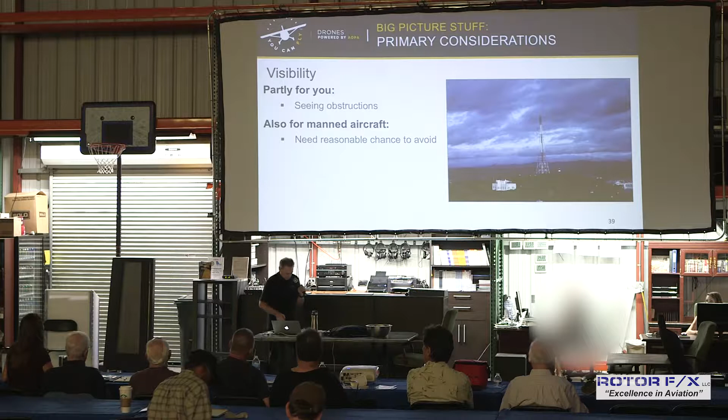Oh, I want to talk also, before we get away from this, let's see, did we talk about this? No, we're about to talk about it, sorry. Okay, here we go, wind.

So, what about wind? Bigger machines can handle heavier winds, generally speaking. So if you're flying a little drone, look at what Bill has over here on the Blue Skies table. It's a Phantom 4, right? And it's not that big. It's subject to wind gusts. If you get winds over about 10 or 12 miles an hour, you're going to have some issues with it. So the bigger the machine, the better it will handle the wind.

If you want to capture silky smooth footage at 10 knots, you're going to need a pretty big rig and a pretty good gimbal on that rig, because you're not going to get silky smooth footage at 10 or 12 knots with the Phantom. It's going to be juggling to hold its space too much.

So wind is a fickle thing, which may result not just in unstable footage, but also uncontrollability. Examples might be strong wind currents, or if you're flying close to the ground, wind can change very quickly in very different ways.

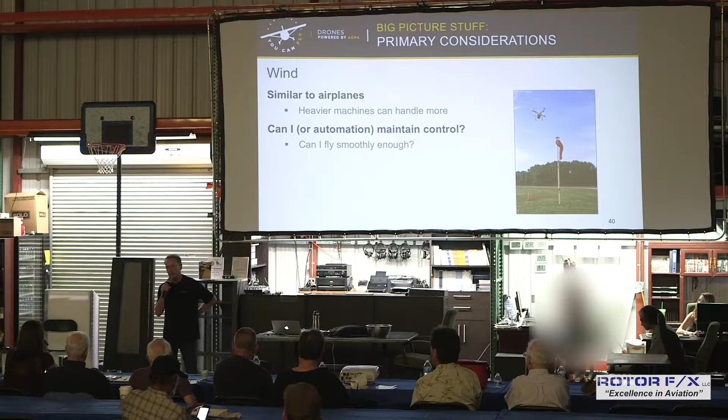I'm going to leave the wind shadow, right? The wind is going to come, and I didn't know it was coming because I wasn't aware of it. I was behind the building. So you've got to be aware of stuff like this, watch for it, and anticipate it.

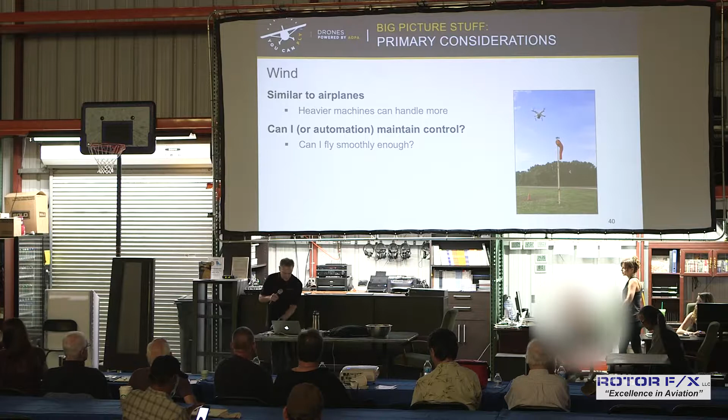Yes, density altitude. How dense is it? Okay, so there's this thing called standard pressure and temperature. Standard barometric pressure is 29.92 inches of mercury. Hg stands for mercury. And standard temperature is 15 degrees Celsius, which translates to 59 degrees Fahrenheit.

So, what you're going to find is all of your drone performance measurements will be made at standard barometric pressure and standard temperature. Meaning that if I buy a DJI Phantom 4 or rent one from Blue Skies, and I go fly it and I look at the specs and it says it's got 22 minutes of duration or flight time, right? I think, great, I can fly for 22 minutes. Well, guess what? That would be great if you were flying at sea level.

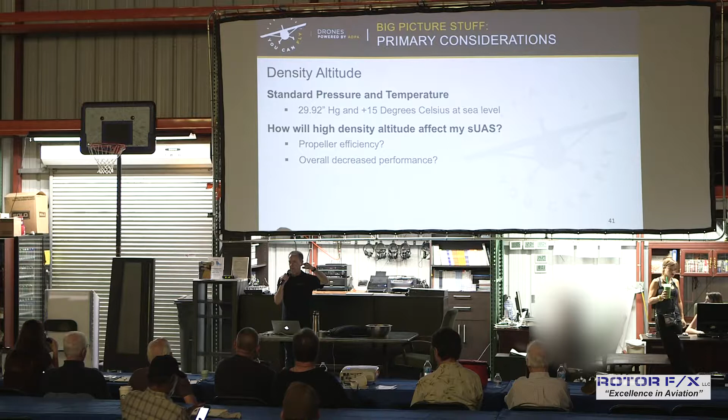What if you're flying at 4,000 feet? The air is less dense. It's called density altitude, right? So what's going to happen in less dense air? I'm sorry, I can't hear you. It requires more power to fly. Not just more power to fly, but ultimately, if you get into a situation where you have a heavy payload that's marginal when you first lift off at sea level, you get to 4,000 feet, you've got that same payload, you may not even be able to get off the ground.

Or if you can get off the ground, you don't have any performance margin, meaning that when you get off the ground to fly a payload, you need a performance margin that gives you what you need to accelerate in order to control the aircraft, to rise or fall or to move forward. All of that requires extra power. And if you're carrying a marginal payload at a marginal density altitude, and the props are having a tough time chopping that air enough to keep you in the air, you've got a problem.

So is density altitude a thing for unmanned aircraft? Yeah, it is. Especially when you get up to the higher altitudes or on the hot days. We've all heard how sometimes it gets in Phoenix or in the Arizona desert to above 110, and they say some airplanes can't fly. That's because the air is not dense enough to give them the lift that they need to get off the ground.

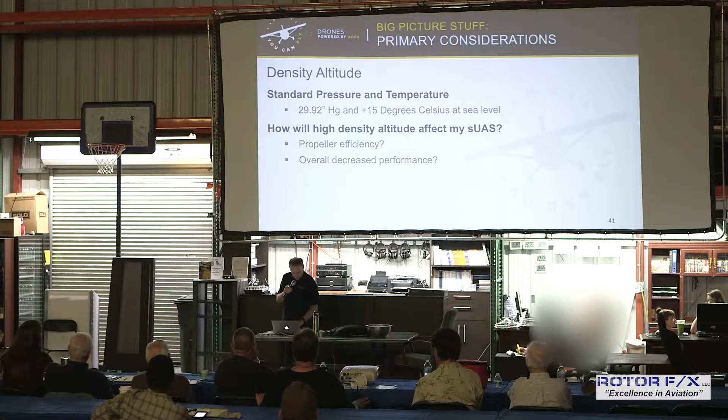And you have the same problem with a propeller, because what is a propeller really? It's just a little wing that spins. Instead of a fixed wing, on the Phantom you've got 4 little wings that spin, right? They're cutting the air, and they're giving you that lift. Does that make sense? Okay. Whew, we got through density altitude. Wow.

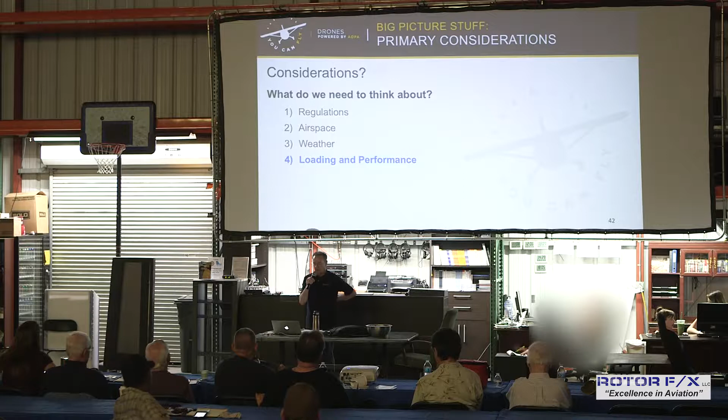Loading and performance. This is fun. We started to nibble around the edges of that when we were just talking about payload, okay? And it's not just payload, but it's also the performance of that payload. So what happens on a small drone with a fixed camera? Can I borrow your Phantom for a second? Thanks, Bill.

So here's a Phantom 4. Professional, yeah? That's Phantom 4 Pro. It's a great little rig. It's a nice little camera on the bottom there. It's a great design because they've taken the optical system and sensor out of a real camera, and they've repackaged it and repurposed it for use on a drone. It's a great package because it's light, it's easy to control. The gimbal requirements for a small package like this are a lot less than they would be for a big camera like what Don is shooting with, right?

Don, bring one of your cameras up here as long as you're headed this way. If you put one of Don's cameras on a drone, do you think it's going to be more difficult to control? Yeah? Okay, and not just difficult to control, but look at this thing. Look at the length of the lens, okay? Do you think you might have some balance issues relative to the center of gravity on the drone? And we'll talk about that in a minute. Oh, I got to give this back. Thanks, Don. Thank you, sir.

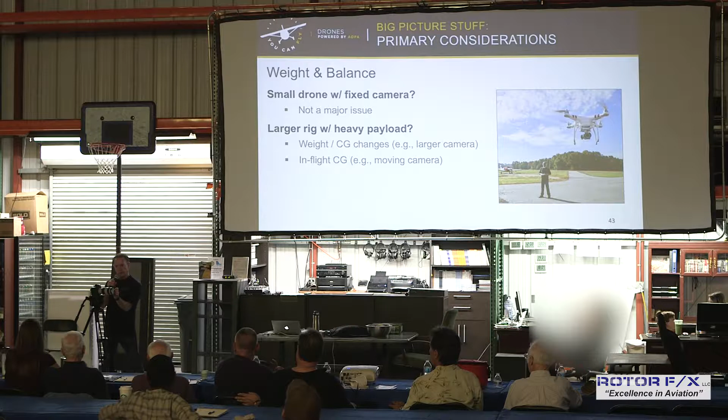Okay, where are we? Loading and performance. Oh, moving cameras also. I'm going to use your camera as an example, Don. Thank you. I know I'm making you crazy now. What if this lens, now, I'm not sure. May I zoom this? Yeah? Okay, so this is internal. Right, so this is a professional lens, meaning that if I zoom it, the zoom happens internal to the lens. The lens doesn't get longer because the optics are all moving inside the lens.

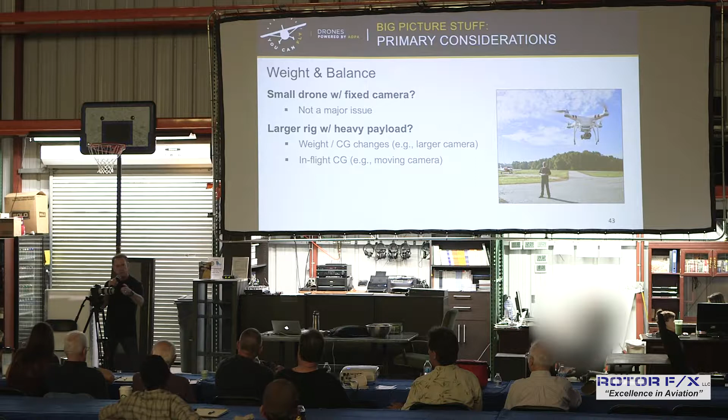But on some less expensive lenses, what happens is when you twist the zoom ring on a telephoto lens, the lens actually extends. And what does that do if it's hanging on a drone and it's perfectly balanced at this point, but if I extend the lens out here, what does that do to the center of gravity? It throws it off. There's going to be more weight on the front of the drone, right?

So it's going to reduce your duration time. Ultimately, it could affect your ability to control it, again, if your payload is marginal in terms of the amount of weight that you're carrying. Make sense? Thank you.

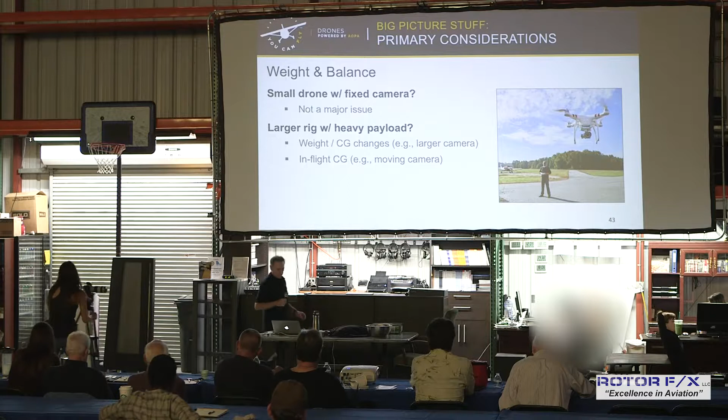Okay, load factor. We really talked about that for the most part. Could you have a stall situation with a quadcopter? Absolutely. Again, we talked about this. The propeller is nothing more than a spinning wing, and if it's got too much load...

If the winds come, let's say you got a heavy wind coming from that direction, now it's leaning in order to keep itself stationary, which these drones do based on GPS coordinates. It's leaning into the wind, so it's exerting more force there. Now, if you've got a marginal payload, you're spending all your time trying to stay level. You may lose altitude while you try to stay level, and ultimately you could crash, right? So this whole loading and performance and balance thing, it's a real thing for drones and aerodynamics.

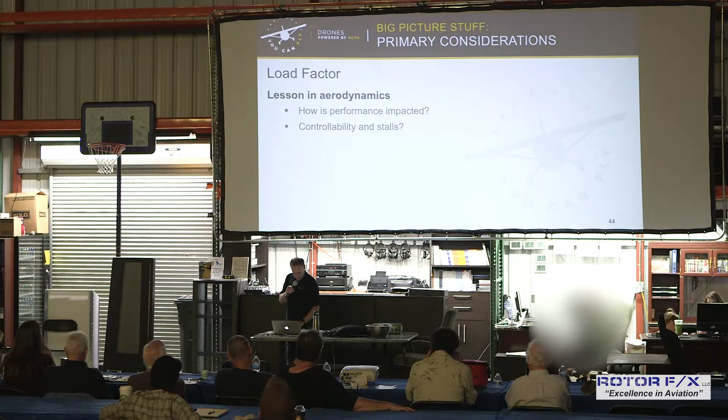Performance, good sources of performance information are the manufacturer's handbook. You'll find the specs in the handbook, obviously, the user's guide, information about the duration and flight time and things like that. You should be aware of those specifications.

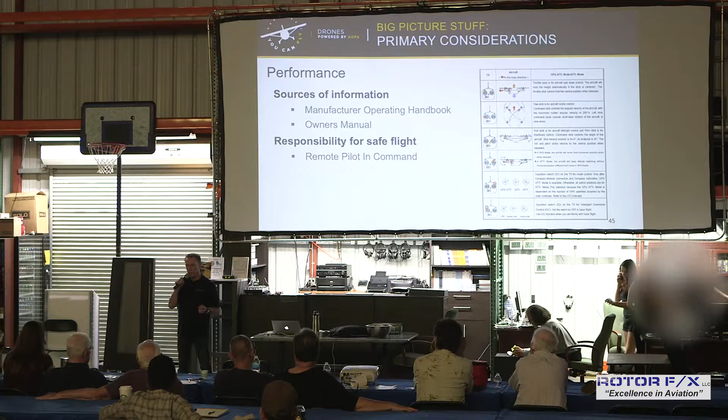The one thing to remember also is, even though there are specifications out there, what if you get out there with that Phantom 4 and something happens and it's not balanced correctly or something like that? Who's responsible if that drone crashes? Is DJI responsible? No, you're the pilot in command.

You're responsible. You own this whole situation, baby. From start to finish, from ground to altitude. You own the whole thing. If that DJI drone crashes because of a firmware problem, it's not DJI's problem in terms of liability, it's your problem.

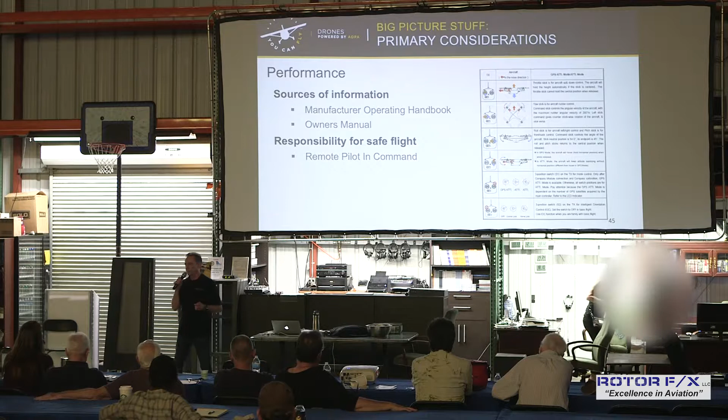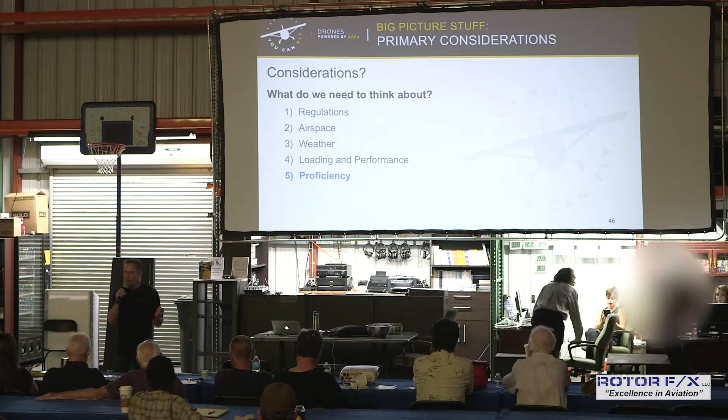Proficiency. Let's talk about stick time, right? What's this thing called proficiency? What do we mean now? For some of my pilots, when I say proficiency, what does that mean to you? Skill and ability. Perfect. Thank you. Skill and ability. What does that mean? It's experience, right? How much experience do you have with that particular aircraft?

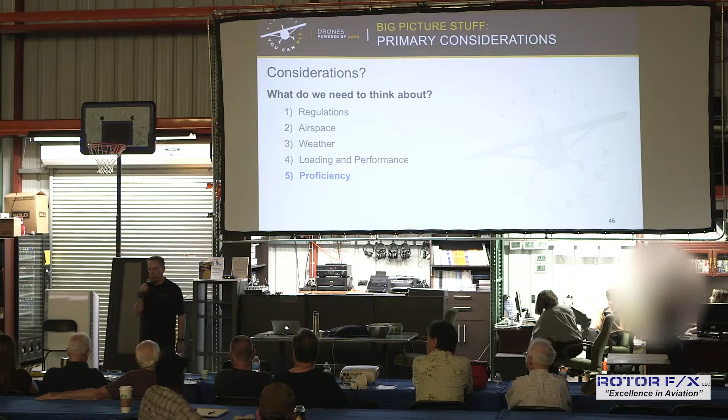And on a UAV like the Inspire 2 here or the Phantom 4, what that translates to is stick time. And the key to this is just get out there and get your stick time. People often ask me, are they difficult to fly? Well, no. I mean, I could set it up and have it flying in 5 minutes, and there's actually a button you can press on the screen of the DJI Go application to have it take off and hover at 4 feet. That's a no-brainer, right?

Yeah, until you have to actually fly it, okay? And the key is, when you first start flying these things, as many of you know if you're flying them now, it's great when it's nose out, because left is left and right is right, and forward and backward are the same. But what happens if it's facing me? Everything's reversed. Everything, okay? And what happens if it's going this way? Or this way? So you get the idea.

The key to this thing is getting enough stick time to where responding to a situation becomes intuitive. Meaning that if I'm flying, and guess what, I'm getting too close to a tree, I'm going this way, what do I do? I'm going to hit backup, right? Which may not be intuitive until you've got enough stick time to know to hit go backwards instead of go forward, right? So my recommendation to you would be go out and get 20 or 30 hours of stick time before you ever even think about shooting commercially.

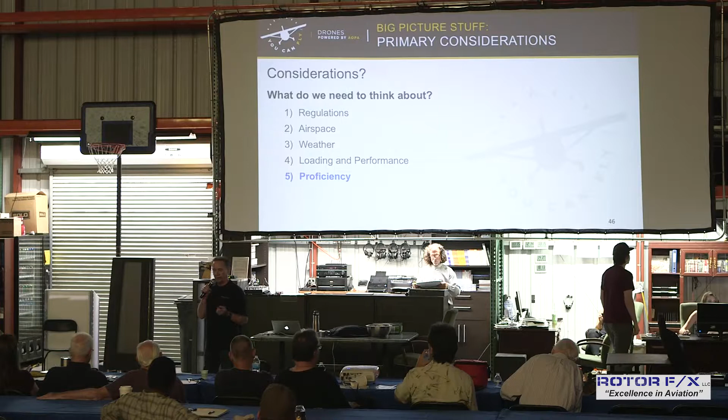And make sure that the stick time you get is with the aircraft you're going to fly. Because all of them are different, they're similar, especially the DJI rigs, they're very similar, because they have the same basic control system. But get experience on the rig you're going to fly and get a lot of it before you go out and start flying.

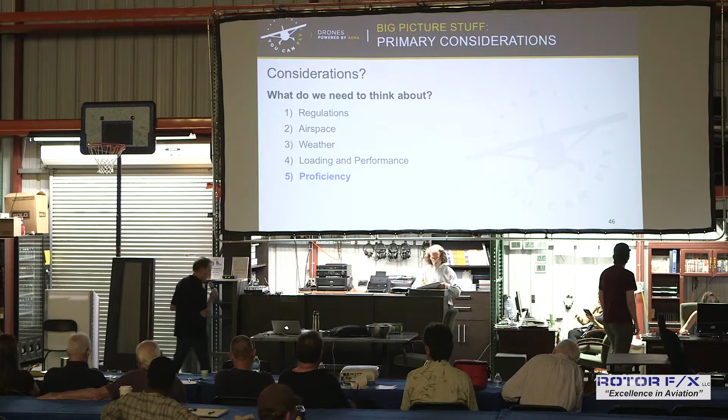I think I really blew by that. Okay, so aircraft, understanding failure modes, abnormal situations, flyaways, loss of GPS.

What could an abnormal situation be? A problem with a firmware update, perhaps? A motor failure? A prop breaking or spinning off or something like that? Not charging the batteries, running out of power too soon and the drone falls out of the air, right?

How about flyaways? What does that mean? You get up, you get in the air, what happens? You accidentally get on the other side of a building and the signal can't get through the building to the aircraft. Well, you've got two problems there.

The first is you should never have gotten on the other side of that building because you're not supposed to fly beyond line of sight, right? The second problem is now you've lost your control link. What's going to happen if that drone is on the other side of the building and you lose your control link?

Well, one of two things is going to happen, okay, depending on whether or not you programmed it properly for the fail-safe mode. I think pretty much all drones these days have what's called a fail-safe mode or return-to-home function, right? And what that means is before you even get off the ground, you program the drone to say, if a lost link situation occurs, here's what I want you to do.

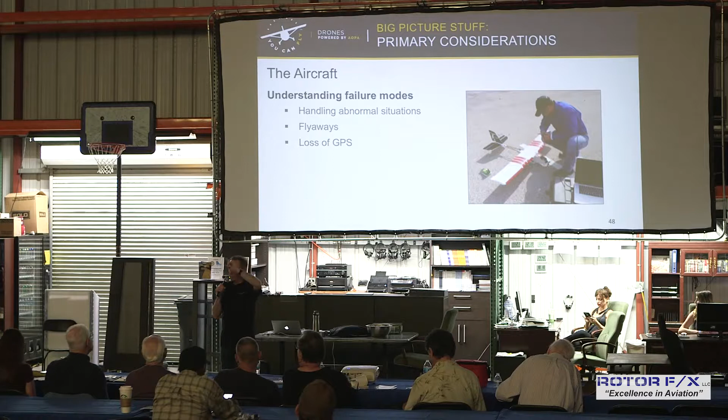They actually talk to a minimum, what's known as a good GPS lock is a minimum of 7 GPS satellites that the aircraft is talking to. I've had mine, because you can see on the screen the number of satellites your aircraft is talking to as far as GPS satellites, you can see the number on the application. I've had as many as 18 satellites locked for my GPS lock. The key is the GPS lock, right?

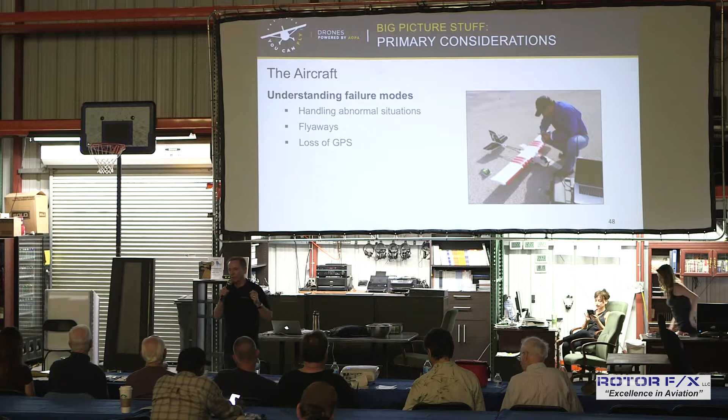If that GPS fails, what happens? Your airplane is going to lose stability, right? It's not going to be able to hold its place in space because it doesn't know where that is. It doesn't have the satellites to talk to. So my point is this: GPS is a great thing because it helps you. If something happens, let's say you're out there flying and you don't have quite enough stick time and something happened, what do you do? Let go of the sticks. It'll stop like that, it'll hold its place in space if it's got the GPS coordinates locked and loaded, right?

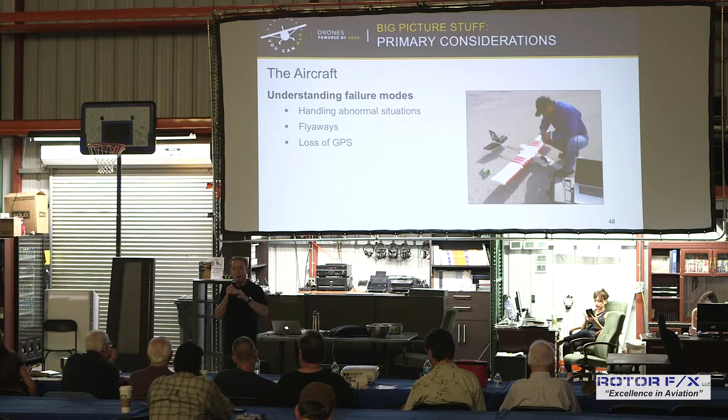But if you have a GPS failure or a marginal GPS lock, what happens? It may drift in a marginal situation. In a total loss of GPS lock, it's not just going to drift - you are in control, baby. And that means if I want to hover here and wind is coming from over here, what's going to happen? It's going to blow that way, it's going to drift with the wind because the GPS lock is not going to hold it in place.

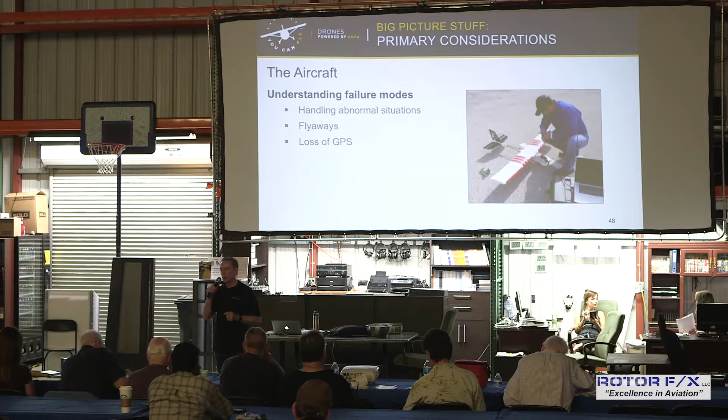So my point is, not just stick time with GPS on - turn it off. Learn to fly that rig totally manually, 100%. Get totally comfortable flying it manually. Don't use GPS lock as a crutch. Okay?

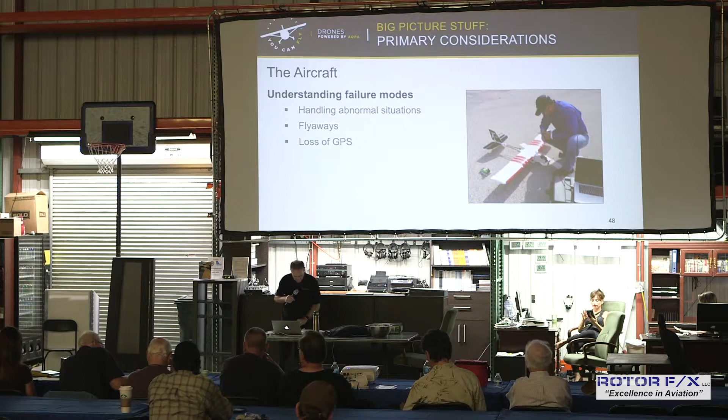State of mind - boy, does that sound mushy or what? Let me ask my pilots in the room, is this a thing? Is this a real thing, state of mind? It really is.

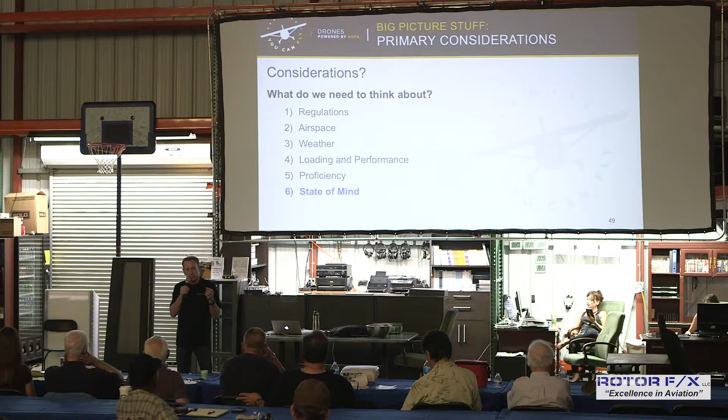Sir, did you have a comment? Yeah, so I'm going to talk about state of mind, I'm going to talk about what that is. You're going to get more information than you thought you wanted to know, actually. State of mind, okay? This is about how there are a lot of things that go into this. It could be state of mind like, how do you feel today? Are you in a good mood? Are you in a bad mood? Did your wife just call you and tell you she wants a divorce? Did your mother just die? Did you have somebody who was affected by the hurricane in the Gulf Coast? State of mind - you're preoccupied with something.

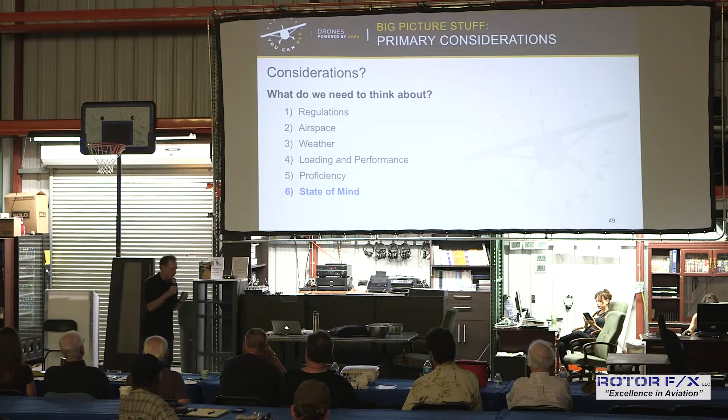But it's not just that, it's not just a preoccupation. The FAA has defined 5 different states of mind, or they call them hazardous attitudes. So anti-authority: don't tell me what to do, right? I know what to do, don't bother me. Leave me alone, I'm flying.

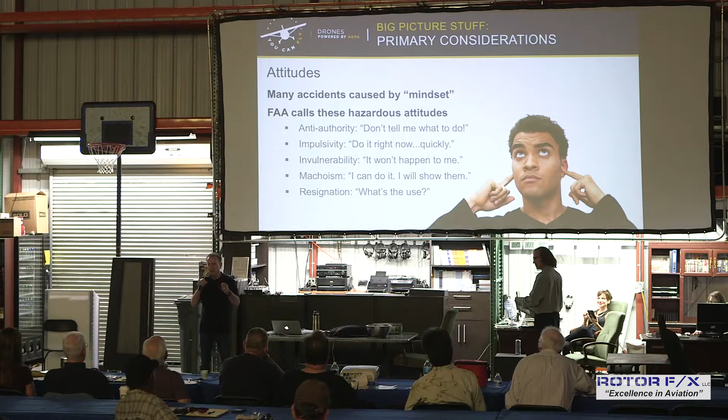Or how about impulsivity? You're on a set, and the director of photography says you need to get this shot, right? Your impulse is going to be, okay, I got to go get this shot. The pressure's on, right? Do it now. Hey, wait a minute - are you going to throw safety aside and go for that shot, or are you going to stop and think about what you really should be doing here?

Impulsivity. How about invulnerability? This is the macho thing, or well, it's actually two different things. Invulnerability: it's not going to happen to me, it only happens to other people. Only other people fly into, drop a $50,000 RED camera or $100,000 camera, right? It's not going to happen to me.

Machoism: I'm going to show these guys. I can do it, damn it. I'll show them - you got no idea what I can do. I'll show you.

How about resignation? Oh, crap, this thing's not working right, what's the use, I should just give up. No - there's a way out of every situation. Stop and think about it and figure it out. Don't just give up.

So all five of these are legitimate, right? Am I right, pilots? These are what you learn. In fact, you have to learn this for your knowledge test for Part 107. So learn these things.

Mission mindset. So I talked about this briefly with one of the hazardous attitudes - mission mindset.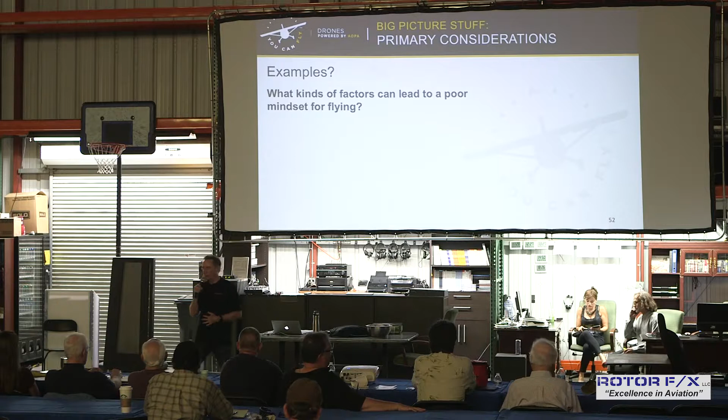Okay, let's talk about decision making. The FAA has this thing called ADM, or aeronautical decision making. This is actually a protocol of when you get into a situation, how do you think? You discipline yourself on how you think yourself through a situation. And it was designed for manned aircraft pilots. It was, I want to say it was United Airlines. Does anybody know? I think it was United that first came up with this years ago. And they wrote it up as an internal training thing for their pilots. And ultimately it's evolved now into an FAA standard called aeronautical decision making.

But it's a specific protocol on how you think your way through a particular situation, instead of panicking, right? Instead of saying, holy crap, what do I do now? Think, okay, well, what's going on here? I got this factor and this factor and this factor that are outside influencers. And I've got this crew. If I'm the captain, I've got my first, my co-captain. And I've got these hardware facilities at my command. How can I put all those together and make the right decision? So it's a disciplined way of thinking about how you do this.

This gets beyond the scope of this presentation and unfortunately I don't have time to address it technically, but the gentleman was asking about milliamp hours and what that equates to. It's basically a measure of the amount of power in the battery. So a battery with 20,000 milliamp hours will fly a lot longer theoretically than a battery with 10,000 milliamp hours, given the same load.

Now there are other trade-offs when you get into designing these aircraft, because you also have weight trade-offs. So if you take the same exact aircraft and go from a 10,000 milliamp battery to a 20,000 milliamp battery, are you going to get the same exact flight time? No, because the 20,000 milliamp hour battery weighs more, which reduces your flight time due to the added weight. It gets somewhat complex when you get into that.

But anyway, I want to talk briefly about these other voltages. Never overcharge beyond 4.2 volts per cell. Never discharge any lower than 3 volts per cell, 3.0 volts. I use 3.2, but the technical guideline is 3.0.

And then there are two other voltage levels that you should be aware of. Or actually two other things that you should be aware of relative to a voltage level called the storage level. These batteries are happiest when they're stored at 3.72 volts per cell. What does that mean? Hang on.